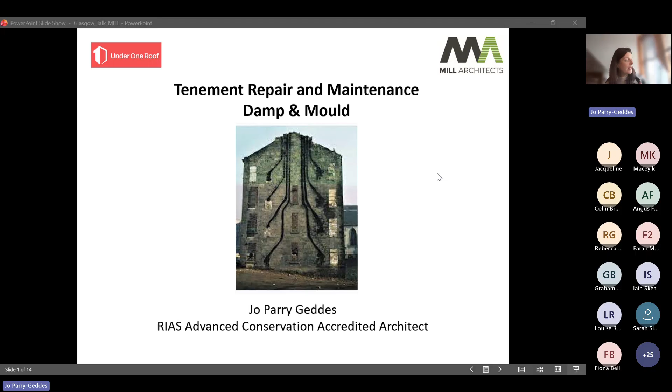So the purpose of our event today is that Under One Roof will be talking about the legals. I'll be discussing general maintenance issues in tenement construction, highlighting common problems that can be found hand in hand with damp and mould. We'll provide an awareness of the importance of property maintenance and how to prevent problems. There's also a wee bit at the end about upcoming parliamentary issues that you might not be aware of. So,

types of tenements. This is a funny one because not everyone really understands or appreciates what a tenement can be. It is classed, as is on the Under One Roof website, that a tenement is any building divided into two or more parts horizontally. So in Scotland, the Romano-Dutch law made it possible to purchase airspace with rights of support and shelter from flats above and below. And because in the cities space was so tight, and they were allowed to build high, and we had a lot of stone, and at that time a lot of quarries still open, we did build high throughout all of our cities, which is why we have so many tenements

as it stands today. Owners are jointly responsible with their co-owners to maintain the common parts of the tenement, which are those that provide shelter and support. So, as I said before, tenements come in various styles, periods and sizes. You've got your traditional tenement, your stone tenement and villa, mostly built before World War I. You've got your older brick and render flats, mainly social housing, built between 1920 and 1940.

You've got your low-rise and your high-rise flats, mainly built by local councils, some of which are private ownership now, of course, in the 60s and the 80s. And then you've got the more modern estates in the last 40 years. So it really does cover an awful lot.

And even if you are in a house divided horizontally, ground floor and the first floor, that is in fact classed as a tenement, and you would be under the rules of the tenement law with that. So back to our point today. Why is it so important to maintain and look after your building?

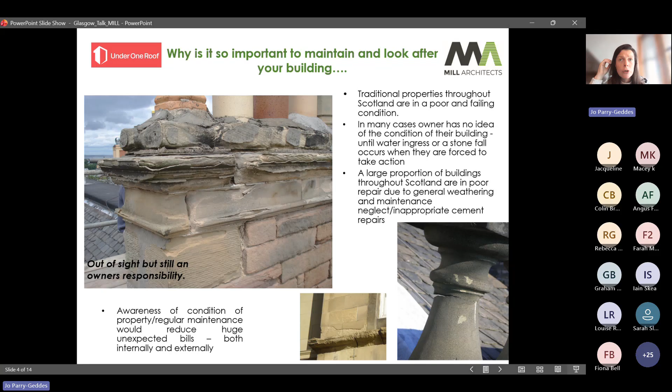A large proportion of buildings throughout Scotland are in poor repair due to general weathering, maintenance neglect, inappropriate yet well-intentioned at the time cement repairs, and also just the sheer difficulty to get your neighbours together and actually carry out a repair to the building. But of course, the awareness of the condition of the property and regular maintenance would reduce huge unexpected bills, both internally and externally. So we find ourselves in a bit of a catch-22 situation.

So what is the incentive to get together with your neighbours and maintain your property? You want to prevent water ingress, causing internal deterioration, rot, damp throughout the property. The photo to the top left is a property that I surveyed a couple of weeks ago, and that area has been caused by a damaged gutter and one slipped slate. So it just shows you how badly it can get out of control quickly.

You want to prevent escalating repair costs. Regular maintenance will reduce larger unexpected bills at a later date, especially if they become enforced. You get a dangerous notice served or what have you, then you're forced into a position where you have to act quickly. And of course, that always comes with an increased cost and an element of panic.

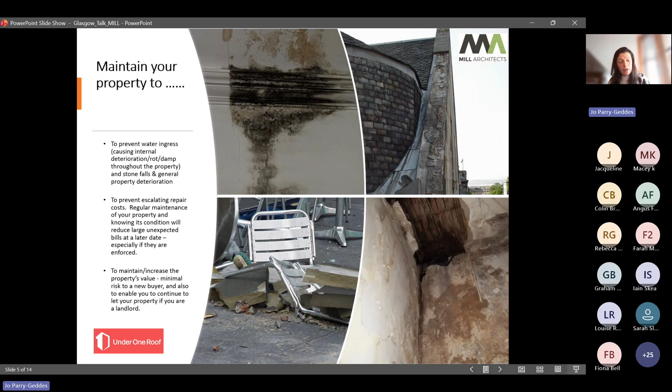You want to maintain and increase the property's value, minimal risk to a new buyer, but also if you're a landlord, you want to be able to let your property out at the full rate that you want to let it out without there being any compensation or problems to your tenant.

So back to basics, your typical tenement construction is basically a big thick wall. You've got 150 mil on the outside of stone. Inside, you've just got a load of rubbish, as you can see in the top left picture. And then internally, you've got your lath and plaster. I think there's a general lack of understanding of how much timber there actually is in a tenement. And of course, with timber, you get your damp, you get your rot, you get your mould, and that can then all grow on your walls.

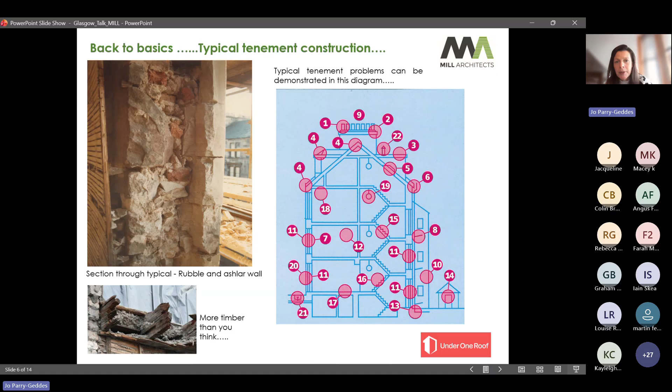You've got timber in the floor joists, the roof rafters, the roof sarking. You've got timber safe lintels above your windows, and of course you've got the lath for the plaster to go onto. And when all this gets wet, you come up with a lot of pink hot spots, which you can see on the right-hand side diagram, which is a typical tenement whereby generally we tend to find problems.

So typical fabric defects, these are pictures from my own projects that we found and resolved. We've got photos and diagrams demonstrating how easily defects can affect the condition of your flat. So the top one is obviously water leaking inside the building from a blocked gutter due to lack of maintenance. This has then soaked the timber beams, and then internally it has soaked the plaster. And of course, all that has got to such a dreadful state that it's collapsed and fallen away, causing expensive problems to fix.

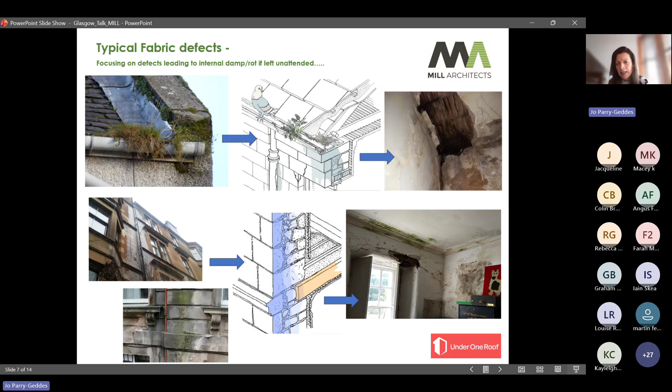Leaking downpipes are a really common problem caused by, again, lack of maintenance or just not picking up on the fact that something's choked or blocked. It doesn't have to cost the earth to sort it out, but in time, it can saturate the stone, make everything very wet, very green, very mouldy, again leading to water going into your joists. The photo to the bottom right-hand side is a property where exactly this happened, and it's a timber safe lintel, which has just kind of collapsed internally. So again, it sometimes doesn't have to cost a fortune to fix, but if left unattended, can prove quite expensive.

So here's a project I worked on a few years ago. It was an external tenement fabric repair.

That we were managing and overseeing. When we got into the top floor property after reports of water ingress and a ceiling collapse, we knew the felt roof needed to be replaced. And as you can see with the blue arrow, there was a crack all the way along the edge of the felt roof, which was letting water in.

When we investigated further, we realised that the continued water ingress over a period of time had led to a fairly significant outbreak of dry rot in the living and the kitchen room. The ceiling had collapsed and it's quite smelly dry rot, so it was quite an offensive smell in the property. Areas of the room had to be completely stripped and treated for the rot. The room was uninhabitable for a number of weeks.

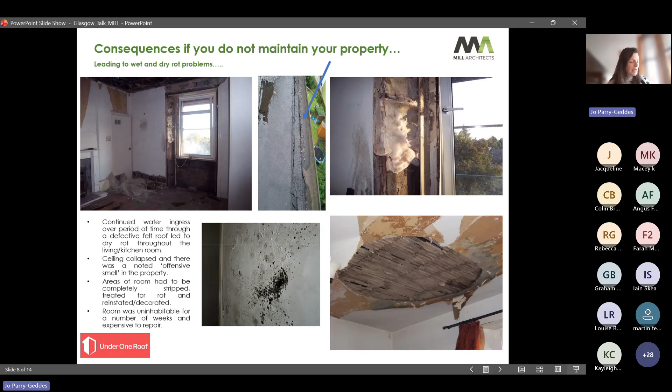That was a property that was actually let out, so that cost the landlord a lot of money to rehome. And it was very expensive to repair. And then you get into the argument of what is communal repairs, what is the owner's repairs, etc. And then you get back into the kind of complicated Tenement Act to be reviewed. So again, try and fix things quickly before it becomes a problem. So more consequences if you don't maintain your property, leading to mould and interior deterioration.

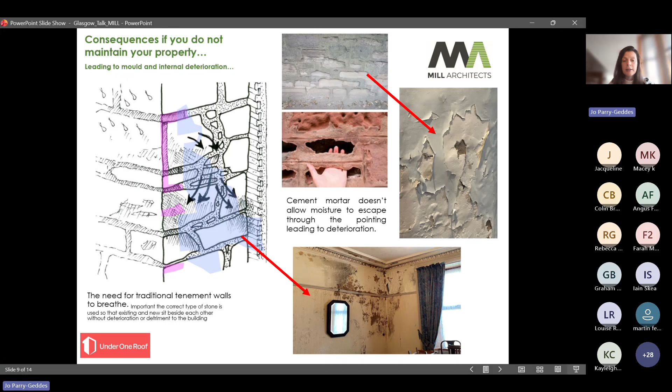So that is one of the reasons that you can get that happening within your building. Your outside might look absolutely fine to you, but it might be that it is cement rendered or there is cement pointing, and that is retaining the moisture, which is causing the internal problems. Basically, buildings need to breathe. So, damp and mould consequences if you don't maintain your property. There's the common problems that certainly I've come across in the last few years that we've been doing this.

As can be seen in the previous slides, there's four sources of moisture that are likely to affect a building. One is penetrating from above, so the rain. So ingress through failure of roof components. This could be from a storm, it could be from lack of maintenance, it could be from the photo I showed you where the gutter had moved away from the building and there was one missing slate. Basically, if your roof is open in an area, it can cause damaging effects.

Penetration through cement, so as I said, through the wall, actually penetrating through the building. That could be through cement, it could be through your damaged rainwater goods that we talked about, and that in turn can then cause real problems internally. And probably something I see the most is from damaged rainwater goods. You get damp and mould caused from below, rising damp, mainly to do with external ground levels and distribution of water around the building, moving up walls.

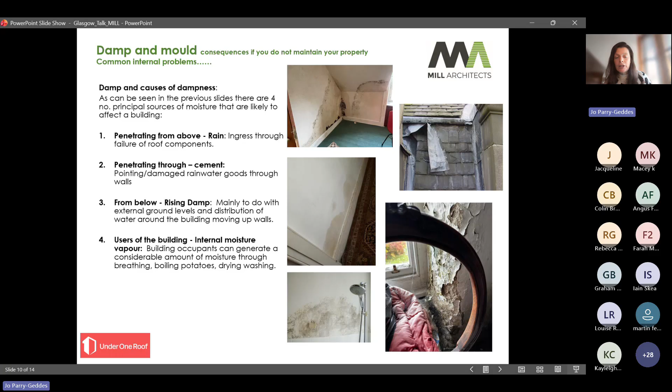And then, of course, you've got the users of the building, the internal moisture vapour. Building occupants can generate a considerable amount of moisture. When you think about it, if you've got 4 people living in a flat, they're all having showers, they're not putting on the extractor fan, or maybe the extractor fan doesn't work properly, they're boiling their potatoes, they're drying, they're washing. That's a lot of moisture in the air, and ventilation and heating does help that.

So, Awaab's law, which Jacqueline's going to talk about in more legal terms than I am, but the Scottish Government is extending the principles of Awaab's law in the private renting sector from March '26, we think, could be later on. I think they're still to confirm the date. Jacqueline will let us know about that. Landlords will have a legal obligation to investigate and resolve complaints about damp and mould within strict timelines. And I think that's the important thing. It needs to be fixed quickly, but that in turn can cause panic and maybe not looking at the whole problem of the building holistically.

What is mould? Mould is all around us. It needs a food source and moisture to grow. It's a type of fungus that grows on surfaces in damp and humid conditions like what we've been talking about. Too much moisture and not enough ventilation and heating will create internal moisture, which will condense on the building fabric, and the source of which could be from a number of issues that we've already discussed. So it's important to find out the source.

Important to find out what's causing it before trying to fix it. Who was Awaab? He was a 2-year-old boy who tragically died in 2020 from a severe respiratory illness caused by prolonged exposure to mould in his social housing flat, despite his family repeatedly reporting the issue. So this law was created in his memory, but also to protect tenants, legally ensuring landlords investigate and fix serious health and safety hazards like damp and mould.

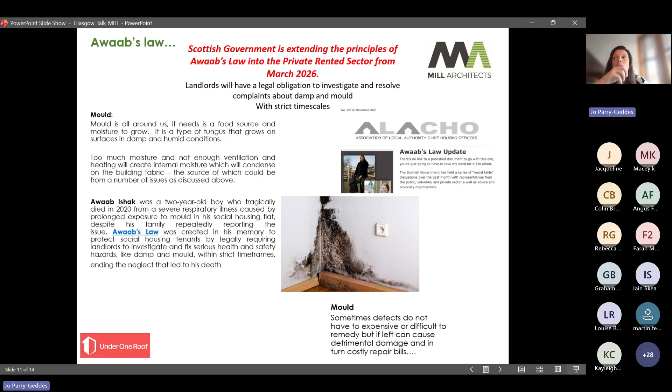Again, you have the problem of the common ownerships, who's responsible if it's internal, what's causing it, and that's why it's important to find out the actual cause of the problem. But Jacqueline will go into more of that in her presentation. Other changes to the law, which we've been working on quite hard, and Under One Roof have been working at quite hard, is there's a motion in Parliament at the moment to change 3 things within tenements.

One is that there will be a quinquennial, we call it, a 5-yearly tenement inspection, basically a more in-depth home report with a lot more information that would be open to the whole tenement and for anyone who was buying or selling the property. Number 2 is the establishment of compulsory owners associations. The Scottish Law Commission have just spent the last 2 years assessing the legalities and possibilities behind us doing this, and they've recently issued their final paper, which advises that it is indeed possible to establish and provides further insight into how this can be achieved.

So very much watch this space, because that's only just been issued, and from that, I know I'm certainly involved in more meetings. There's more parliamentary meetings to be had. So we are hoping that this will come into force in the next couple of years or so. And if it does, it is very much going to change how tenements are repaired and maintained in the future.

The third thing is the establishment of building reserve funds. And that's whereby everyone in your flat might put in £50 or £100 or whatever it is a month to maintain and repair your building, maybe clear out your gutters, sort out any missing slates or what have you. Really common in Europe, basically comes hand in hand with the establishment of owners associations. We're pretty much the only country that don't do this. But currently item 2 is the only item which has been reviewed by the Law Commission, but all 3, as you can appreciate, kind of come hand in hand.

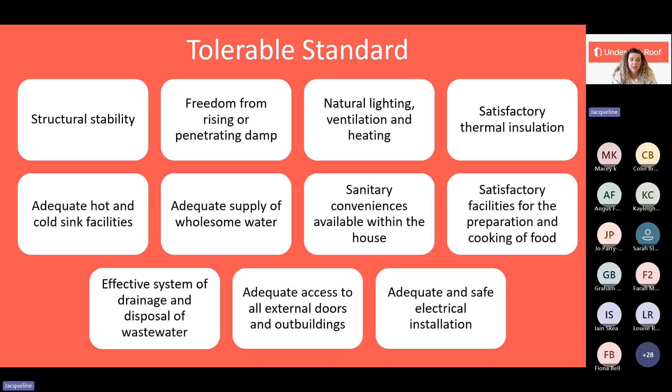But we need to get on top of this, and we need to start looking at not just what's happening within the four walls of our property, but what is actually happening within the building itself. So we have Awaab's Law, which is pending. As I say, it was included within paragraph 47 of the 2025 Act, and the Scottish Government's intention is to extend the principles of Awaab's Law into the private rented sector and the social housing sector in Scotland from March this year. So it's only a couple of months away.

The Cabinet Secretary is introducing the secondary legislation to Parliament on Wednesday this week, I believe, where it's to be voted on. So we should hopefully have more information as the week goes on as to what the plans are for implementing this. Why are we implementing Awaab's Law? It's part of the wider effort to raise standards in Scotland's housing sector. And we recognise that there are serious issues with damp and mould across our housing stock in Scotland, and nobody wants to be in a situation where there's going to be a repeat of what happened to Awaab and his family, and nobody wants a loss of life as a result of damp and mould growth.

So what will that mean for you as a landlord? Well, you'll have a legal obligation to investigate and resolve complaints about damp and mould, and you'll have strict timeframes to comply with in the repairs process. There's been a lot of questions over what shape Awaab's Law will take in Scotland, and it was announced last week, alongside the Cabinet Secretary's plans to introduce secondary legislation in Parliament on Wednesday this week, that the Scottish Government is intending to adopt the English model for Awaab's Law.